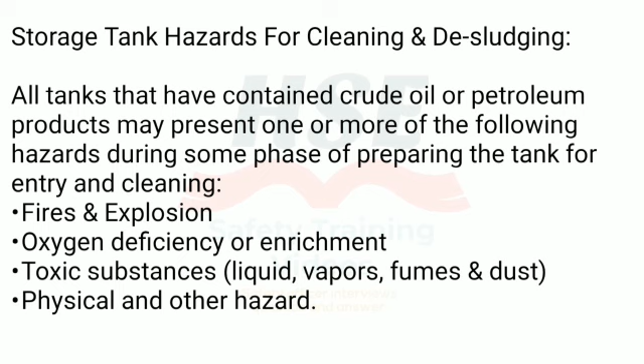11.1.1 Fire and explosion hazard. The potential for a fire within or outside a tank can exist during all phases of tank work, from decommissioning through recommissioning, depending upon a number of factors including tank design, its integrity, air fuel ratio and the number of open vents. Fire inside a tank may cause an explosion due to expanding gas.

11.1.2 Oxygen deficiency. An oxygen deficiency can exist in a tank for a number of reasons. A. The vapors of some hydrocarbons stored in atmospheric or low-pressure tanks are heavier than air and will displace or dilute air. B. If a tank has been closed, oxidation or rust can deplete the tank oxygen content. C. A tank that is maintained under an inert gas will be almost devoid of oxygen.

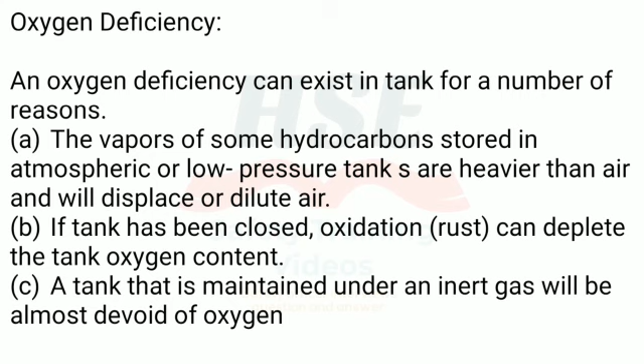11.1.3 Oxygen enrichment. An oxygen enrichment hazard is where the oxygen concentration is over 23.5%. Occasionally, oxygen bottles or cylinders used during tank work may leak and provide a source of oxygen enrichment.

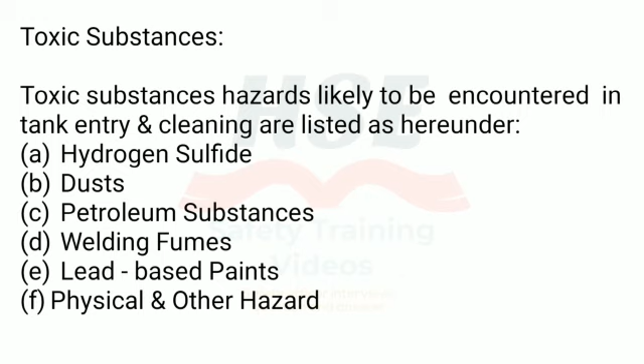11.1.4 Toxic substances. Toxic substance hazards likely to be encountered in tank entry and cleaning are listed as hereunder: A. Hydrogen sulfide. B. Dusts. C. Petroleum substances. D. Welding fumes. E. Lead-based paints. F. Physical and other hazards.

A. Hydrogen sulfide. H2S is an extremely toxic, flammable gas that is encountered in the production, processing and storage of sour crude oil. Exposure to a high enough concentration of H2S causes death by paralysis of the respiratory system.

B. Dusts. Dust encountered in tank maintenance includes that caused by the removal of rust, paint and tank insulation.

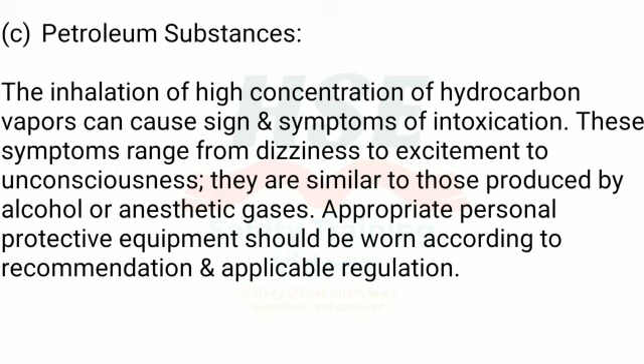C. Petroleum substances. The inhalation of high concentrations of hydrocarbon vapors can cause signs and symptoms of intoxication. These symptoms range from dizziness to excitement to unconsciousness, and are similar to those produced by alcohol or anesthetic gases. Appropriate personal protective equipment should be worn according to recommendation and applicable regulation.

D. Welding fumes. Toxic fumes are generated during welding on metals coated with or containing alloys of lead, zinc, cadmium, beryllium and certain other metals. Some paints may produce toxic fumes when heated with a welding torch. The potential health effects of welding fumes vary in type and severity depending on the composition and concentration of fumes generated.

E. Lead-based paints. Significant lead exposure can occur during removal of paint from surfaces previously coated with lead-based paint. Cumulative exposure to lead may result in damage to the blood, nervous system, kidneys, bones, heart and reproductive system. Prior to commencing work on a tank, a written lead abatement program shall be developed for the safe removal and handling of lead-based paint. This program shall include procedures for the use of appropriate engineering controls, work practices and personal protective equipment to keep exposure below permissible limits.

F. Physical and other hazards. In addition to injury or property damage that may result from fires, explosions, asphyxiation and toxic substances, additional hazards may emerge from the following situations.

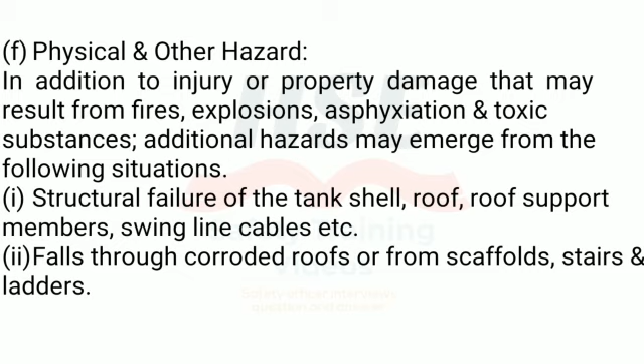1. Structural failure of the tank shell, roof support members, swing line cables etc. 2. Falls through corroded roofs or from scaffolds, stairs and ladders. 3. Accidental discharge of steam, high pressure air, water or oil either into the tank or against personnel working outside, due to inadequate isolation. 4. Failure to disconnect or make electrical or mechanical equipment inoperative.

5. Use of lighting fixtures inappropriate to hazardous area classification. 6. Sharp angles, welding lugs etc. within the tank that can snag clothing or skin, in addition to tangling or cutting retrieval lines.

11.2 Additional hazard considerations for floating roof tanks. The following additional hazard considerations are to be kept in view as a measure to identify, evaluate and protect entrants from potential hazards associated with entry on floating roofs.

11.2.1 Hydrocarbon entrapment hazard. A flammable atmosphere may also be present inside pontoons, devices for providing buoyancy, floats, primary and secondary seal areas, or underneath floating roofs out of flotation. These areas must be considered as separate confined spaces and must be tested appropriately. These spaces may also need to be ventilated or inerted and the atmosphere retested prior to permitting entry.

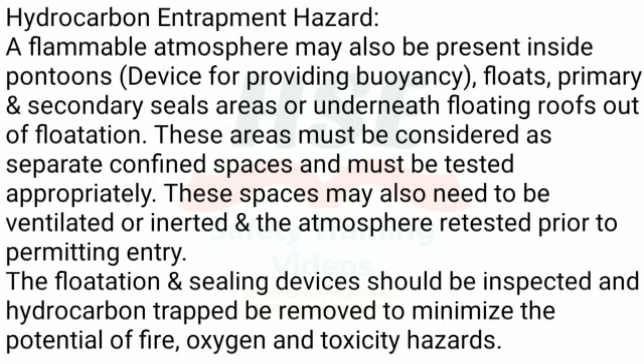The flotation and sealing devices should be inspected and trapped hydrocarbons removed to minimize the potential of fire, oxygen and toxicity hazards. The greatest vapor concentration above the floating roof may be expected when the roof has been out of flotation and is then being refloated. These vapors may persist for extended periods depending on conditions.

11.2.2 Potential fire hazard. Some of the potential fire hazards associated with descent upon floating roofs include, but are not limited to the following: A. A flammable vapor-air mixture may exist in the atmosphere above the floating roof due to roof seal leakage. B. A flammable liquid may be present on the floating roof due to overflow or pontoon leakage.

C. A flammable liquid or vapor may be present in the pontoon or seal area due to pontoon leak or seal rupture. D. The leakage of liquids or vapor from pontoons, buoyant foam panels, other flotation devices, linings and seals may result in toxic or flammable vapors being present in the tank vapor space.

E. When the floating roof is out of flotation and the liquid level is below the roof support, a flammable vapor-air mixture may exist in the atmosphere below the roof. F. A buildup of vapors may be more likely in internal floating roof tanks because of the possibility of liquid being retained inside the envelope formed of flotation and sealing components.

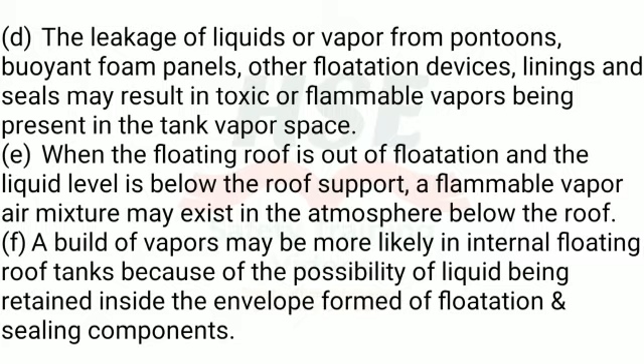G. Plastic used in internal floating roofs may be combustible, and this characteristic should be considered, particularly for activities involving hot work or source of ignition. Seals may also be made of combustible material or may be oil-soaked.

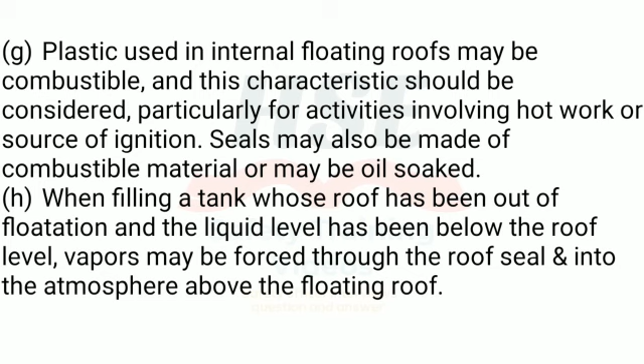H. When filling a tank whose roof has been out of flotation and the liquid level has been below the roof level, vapors may be forced through the roof seal and into the atmosphere above the floating roof.

11.2.3 Potential physical hazards. Entry onto floating roofs presents potential physical hazards including but not limited to: A. Floating roofs shall be visually inspected from above for structural stability prior to descent. The height of the roof above the tank bottom may not permit personnel to walk erect.

B. Many internal floating roofs are of light construction and walking on the roof surface can be hazardous unless limited to areas designated for that purpose.

C. If weak areas are found during inspection or are known to exist in the floating roof, access to these areas shall be prohibited until suitable reinforcement has been provided.

D. Defective roof areas or panels, which were not designed to support the weight of personnel, may be difficult to detect because of the restricted visibility above the roof.

E. Entry upon internal floating roofs which do not have pontoons for increased buoyancy should be considered extremely hazardous and conducted under specific safe work procedures and practices to protect entrants from entrapment in case the roof sinks or tilts.

The outside roofs and covers, wind girders, ladders, stairways, walkways, rails and other roof supports shall be inspected to assure that they can hold the weight of any equipment or material to be placed on top of or attached to them.

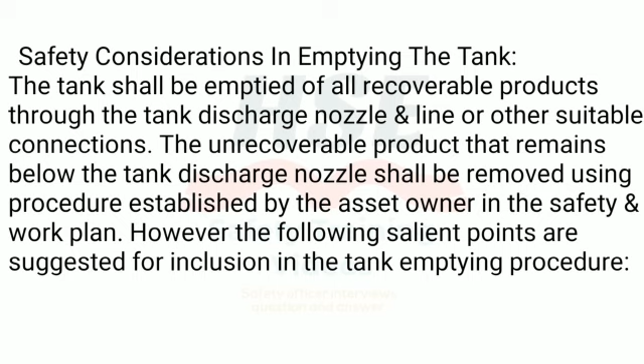However, the following salient points are suggested for inclusion in the tank emptying procedure. A. The tank to be emptied through existing lines until the main pump nearly loses suction.

B. If a temporary field pump is used to complete the emptying process, check the safety and integrity of the pump, hose and other accessories including conformance to hazardous area classification.

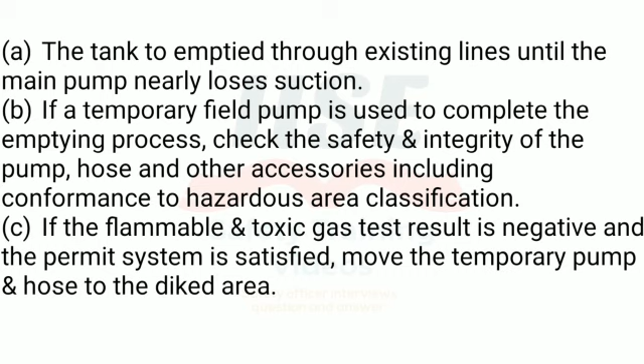C. If the flammable and toxic gas test result is negative and the permit system is satisfied, move the temporary pump and hose to the diked area. D. Confirm that temporary equipment is electrically bonded and grounded.

E. Pump out remaining liquid with the field pump until it loses suction. F. Alternate method for removing remaining product is by filling water into the tank; the remaining oily product will float on water and can be removed through the discharge line.

11.3.2 Safety considerations in isolating the tank.

The tank shall be isolated from all lines connected to the tank by using blanks, blinds, or double block and bleed valves, all of which shall be as close as possible to the tank.

If the tank valve or line is to be removed and the tank has cathodic protection, the following precautions are to be taken: 1. The cathodic protection shall be turned off. 2. A bond wire shall be installed from the tank to the line. 3. The valve or line shall be disconnected and removed along with the bond wire.

The following additional safety considerations are to be adhered to for tank isolation and preparation prior to tank entry. A. Prepare documents required under the permit program and the lockout, tagout procedure, including isolating device listing. B. Close all suction and discharge lines at the tank and install lockout, tagout devices.

C. Lockout and tagout all energy sources such as pumps, motors, mixers, and instrumentation devices. D. Use of motorized equipment, such as automobiles, trucks, forklifts, welding machines, and compressors shall be limited to safe areas by posting signs and barricading access as necessary.

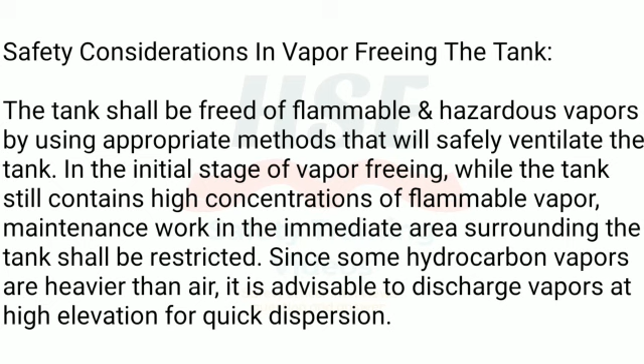There are several methods of vapor freeing a tank, such as mechanical ventilation, steam ventilation, inert gas purging, and natural ventilation.

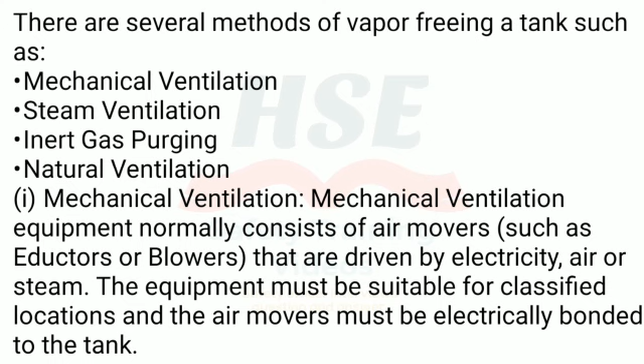1. Mechanical ventilation. Mechanical ventilation equipment normally consists of air movers, such as eductors or blowers, that are driven by electricity, air, or steam. The equipment must be suitable for classified locations, and the air movers must be electrically bonded to the tank. Air movers which have moving parts or can otherwise produce spark or ignition source should not be used in applications where tank vapors may be in the flammable range and will pass through the air mover. Eductors with no moving parts should be used in such applications.

2. Steam ventilation. Steam ventilation may be advantageous in specific cases, but its use introduces some additional hazards. Steam ventilation should be avoided when suitable alternatives are available.

3. Inert gas purging. If this method of gas freeing is used, then additional precautions are necessary to ensure appropriate ventilation for removing the inert gas prior to tank entry and cleaning.

4. Natural ventilation. Natural ventilation simply entails removing the roof and shell manway covers and allowing the tank to stand idle until natural ventilation makes the tank vapor-free. Natural ventilation should be avoided if other methods are available because vapor may drift to a source of ignition.

B. It is highly recommended for the asset owner to prepare a detailed procedure of vapor freeing based on size and type of tank.

11.3.4 Safety precautions for testing the tank atmosphere.

Prior to starting any work outside or inside the tank, testing of the tank atmosphere for the following contents shall be carried out in the order as mentioned hereunder: oxygen content, flammable vapors, toxic vapors.

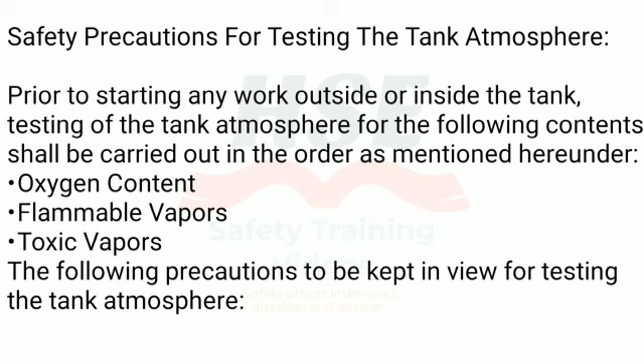The following precautions are to be kept in view for testing the tank atmosphere. A. The test equipment should be intrinsically safe or suitable for hazardous area classification. B. The atmosphere around the tank shall be tested after the completion of preparatory steps and during the ventilation process, when and how much activity can take place around the tank.

C. The test shall also be taken at points where vapors are being exhausted from the tank and in the area around to ensure non-existence of flammable and toxic vapors above permissible levels.

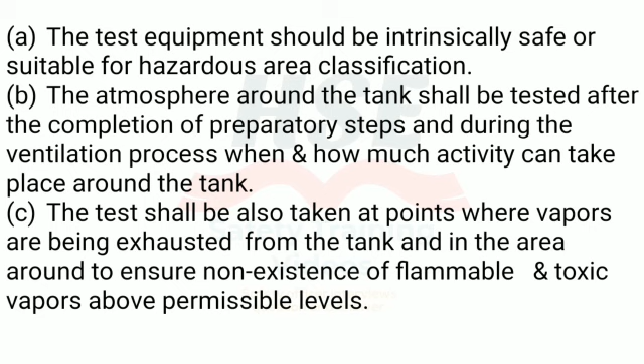D. A qualified person shall test the internal atmosphere to establish existence of permissible entry conditions throughout the tank. F. The atmosphere inside the tank interior shall be tested especially in critical and suspect areas, such as leaking tank bottom, roof supports, sumps, roof seals, roof drains, etc.

G. The ventilating equipment should be shut down for 15 minutes, allowing the tank atmosphere to reach equilibrium conditions before testing the interior. H. The qualified person performing the test shall wear self-contained breathing apparatus (SCBA) and appropriate protective clothing when entering the tank for testing purposes.

Care shall be taken by the qualified person who performs the tests to ensure that results represent the true condition of the tank.

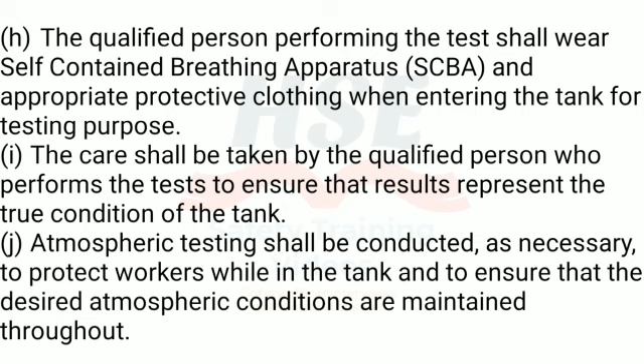Atmospheric testing shall be conducted, as necessary, to protect workers while in the tank and to ensure that the desired atmospheric conditions are maintained throughout.

The results of atmospheric testing, the time of testing, and the signature of the person who performed the tests shall be recorded in the entry permit, as well as in the work permit.

If test results and tank conditions are acceptable, the entry permit for work will be issued. If test results are not acceptable, then the ventilation process will continue and testing steps will be repeated.

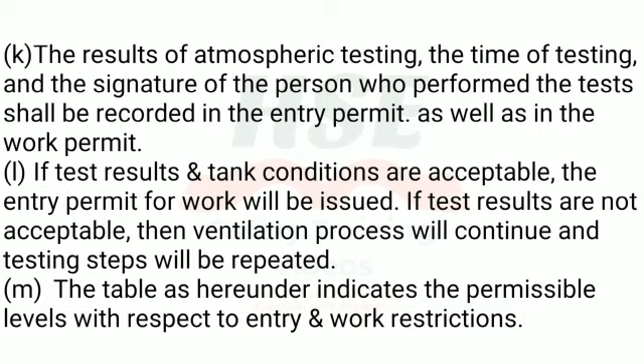The table hereunder indicates the permissible levels with respect to entry and work restrictions. Entry without respiratory protection is permitted, referring to Notes 1 and 2, when oxygen concentration is between 19.5% and 23.5%.

H2S concentration is less than 10 parts per million, air contaminants are below permissible exposure limits (PEL), hydrocarbon concentration is less than 1% of LFL, and an adequate flow of fresh air is maintained.

Respiratory protection is required for entry when oxygen content is less than 19.5% or greater than 23.5%.

H2S concentration is greater than 10 parts per million, air contaminants are above the permissible exposure limit (PEL), or hydrocarbon concentration is greater than 1% LFL but less than 10% LFL.

No entry is permitted when hydrocarbon concentration is greater than 10% LEL.

No entry is also required when hazardous materials such as acids or caustics are present, when the toxicity of the atmosphere is immediately dangerous to life or health, or when the facility or associated process is experiencing an operational problem.

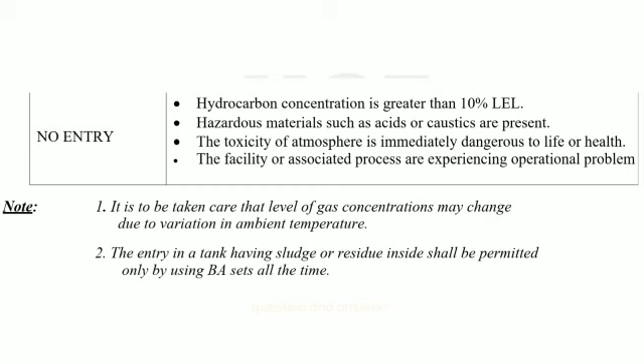Note 1: it is to be taken care that the level of gas concentrations may change due to variation in ambient temperature. Note 2: entry into a tank having sludge or residue inside shall be permitted only by using BA sets at all times. Section 11.4: Precautions for entry upon a floating roof tank.

11.4.1 Ventilation requirements: mechanical forced air ventilation arrangement will vary according to the type, size and configuration of the tank. Air or steam-driven eductors or blowers are recommended in order to reduce ignition hazards.

If electric motor-driven blowers are used, they shall be suitable for the hazardous area classification. All air movers shall be properly bonded to the tank shell or roof to eliminate the possibility of any electrostatic accumulation.

A. The atmosphere within the work area shall be periodically tested as necessary to ensure that the continuous mechanical forced air ventilation is preventing the accumulation of any hazardous atmosphere.

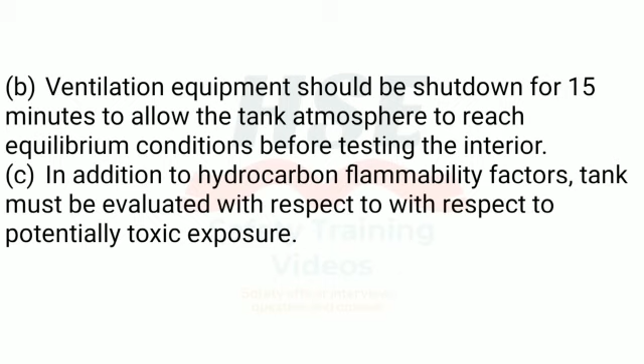B. Ventilation equipment should be shut down for 15 minutes to allow the tank atmosphere to reach equilibrium conditions before testing the interior. C. In addition to hydrocarbon flammability factors, the tank must be evaluated with respect to potentially toxic exposure.

11.4.2 Testing the atmosphere above and below the floating roof. In addition to precautions and procedures described in Section 6.4 for testing the tank atmosphere, the following care should also be kept in view.

A. In case of floating roof tanks, particularly the internal type, initial oxygen, flammable vapor and toxic substances tests may be made with an instrument equipped with an extension device.

B. This testing can be done from the top of the tank so that preliminary readings can be obtained without descending onto the internal roof.

C. For descent onto the tank roof for further testing, the tester should have appropriate respiratory protection and protective clothing.

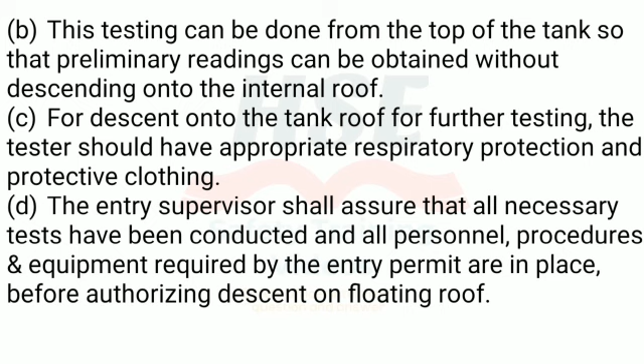D. The entry supervisor shall assure that all necessary tests have been conducted and all personnel, procedures and equipment required by the entry permit are in place before authorizing descent onto the floating roof.

E. As a minimum, atmospheric testing shall be conducted prior to descent at the beginning of each shift, prior to re-entry after any prolonged periods of inactivity or work interruption, prior to starting hot work, and any time conditions are suspected to have changed.

F. The atmospheric testing in the work area above the surface of the floating roof shall be either continuous or conducted as necessary to assure the continuation or maintenance of permitted safe working conditions.

G. The need for continuous or intermittent monitoring and the use of approved respiratory protective equipment shall depend on the results of the testing and the potential for increased atmospheric contamination or oxygen availability during entry and work operation.

H. If potential exists for acute toxic exposures, such as H2S, then continuous monitoring equipment shall be used even if initial monitoring indicates a safe level.

I. The criteria for entry without respiratory protection will be based on permissible exposure limit (PPM) rather than percent of LFL. J. The results of testing the atmosphere above the floating roof must meet the following criteria.

1. The oxygen content of the air is at least 19.5% and not greater than 23.5% for entry onto the floating roof without air-supplied respiratory protection, provided there is no flammable or toxic concentration.

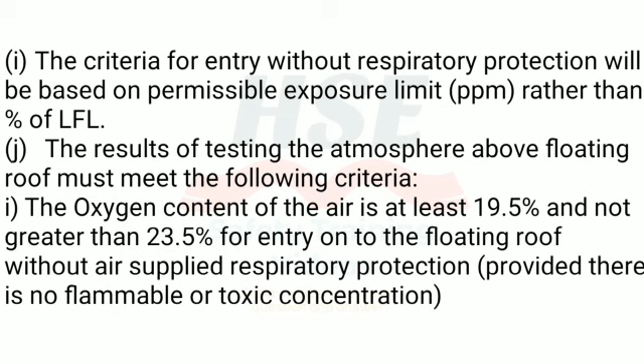2. The oxygen content of the atmosphere is at least 10% in order to accurately determine flammable hydrocarbon vapor levels. 3. Hydrocarbon vapor levels in the atmosphere are below 10% LFL in order to allow entry onto the floating roof with approved respiratory protection system.

Precautions for descent onto external, open-top floating roofs. Before initial descent onto the floating roof is authorized, the assigned tester shall conduct atmospheric tests from outside the tank. The following precautions in this regard are to be observed.

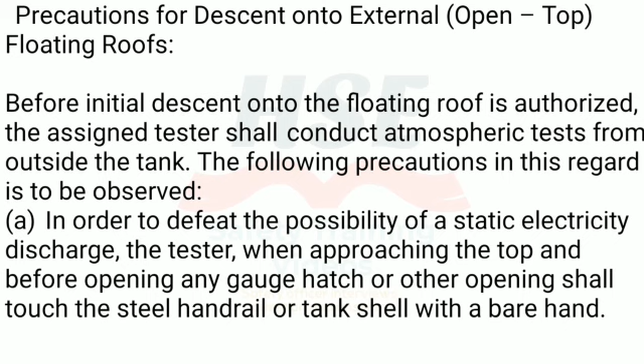A. In order to defeat the possibility of a static electricity discharge, the tester, when approaching the top and before opening any gauge hatch or other opening, shall touch the steel handrail or tank shell with a bare hand.

B. After atmospheric tests have been conducted from outside the tank, the tester shall descend cautiously for the purpose of gas testing, wearing an approved air-supplied respirator if the tank contains sour product.

C. An attendant shall be stationed at the platform or access ladder on the roof of the tank to observe and maintain visual and/or oral contact with the tester during the initial descent.

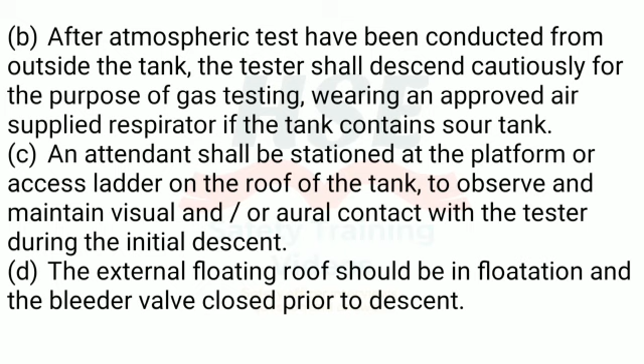D. The external floating roof should be in flotation and the bleeder valve closed prior to descent. E. Entrants shall not be allowed to descend onto an external floating roof which is out of flotation until atmospheric testing has been conducted both above and below the roof and the condition is acceptable.

F. Following the initial descent and completion of atmospheric testing and inspection by the tester, the entry supervisor shall ensure that all required conditions specific to the proposed work have been met prior to issuing an entry permit.

G. Leg positioning pins should be located in the high roof position with retaining cotter pins. This precaution will facilitate cleaning operations by supporting the roof at as high a position as possible above the tank bottom. H. Atmospheric testing shall be conducted continuously or at regular intervals during work on the external floating roof.

If the work is to be performed on or near seals, vents or other openings, additional testing must be conducted to assure that the atmosphere in the immediate work area meets established safe work conditions.

I. Any entry into the pontoons or underneath the secondary seals of an external floating roof shall be considered as permit-required confined space entry. Each individual space shall be checked to determine the atmospheric conditions prior to issuance of entry permit.

J. Should operating, physical or atmospheric conditions change so that the area is no longer safe for work, entrants shall leave the floating roof immediately and shall not return until the safe entry conditions are confirmed through retesting as per procedure.

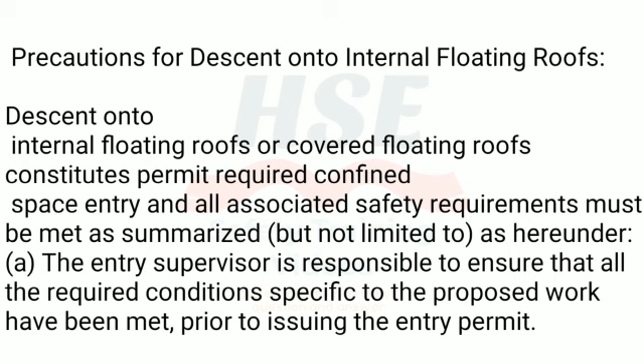B. The potential atmospheric hazards—flammable, toxic and oxygen deficiency—in the space between the internal floating roof and the cover on the top of the tank shall duly be considered.

C. The internal floating roof should be in flotation, not sitting on its legs, and bleeder valve closed prior to descent. D. Entrants shall not be allowed to descend onto an internal floating roof which is out of flotation, sitting on its legs, until atmospheric testing has been conducted both above and below the floating roof and conditions allow the issuance of a work permit.

E. Prior to descent, the internal floating roofs shall be checked for potential physical hazards and stability. The potential for falling through or tilting aluminum, expanded foam, or plastic floating roof shall be evaluated.

F. All electrical and other power-operated equipment such as tank mixers, heaters, steam coils and remote control tank valves shall be shut off at their motor controllers and locked and/or tagged as per procedure.

G. Continuous forced air mechanical ventilation may be necessary to maintain a safe atmosphere in the space above the internal floating roof. H. Any entry into the pontoons or underneath the secondary seals of an internal floating roof shall be considered as permit-required confined space entry.

Each individual space shall be checked to determine the atmospheric conditions prior to issuance of entry permit.

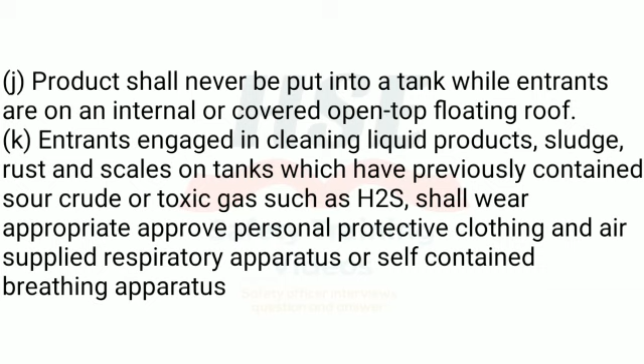Entrants engaged in cleaning liquid products, sludge, rust and scales on tanks which have previously contained sour crude or toxic gas such as H2S shall wear appropriate approved personal protective clothing and air-supplied respiratory apparatus or self-contained breathing apparatus.

11.7 Safety and rescue equipment. Difficult rescue situations can develop if entrants become ill, are injured, or are otherwise incapacitated while on the floating roof or inside the tank. The appropriate rescue provision to be used will depend upon the type, service, and operations of the tanks and the work being performed.

The safety plan for tank work should include a means for timely rescue of workers from the tank with the following considerations. A. Self-contained breathing apparatus, SCBA, should be immediately available at the tank for rescue operation by trained personnel. B. A light-weight material to spread the weight of personnel over a greater area of the floating roof. C. A rescue toboggan, which will fit through the roof manway for lifting an incapacitated person out of the tank.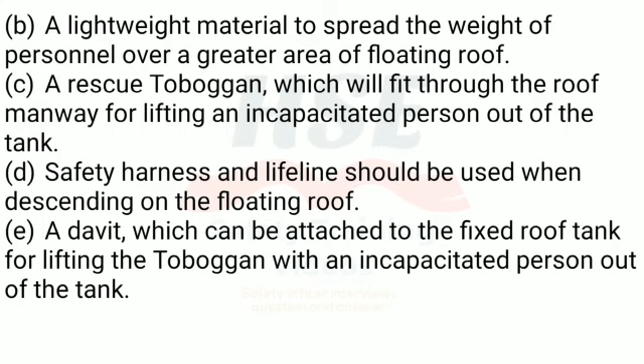D. Safety harness and lifeline should be used when descending on the floating roof. E. A davit, which can be attached to the fixed roof tank for lifting the toboggan with an incapacitated person out of the tank. F. An attendant shall be stationed at the top of the ladder or near the roof opening to maintain visual or oral contact with entrants on the floating roof.

G. The attendant shall immediately advise the entrants if an emergency occurs elsewhere in or near the facility, which requires them to exit from the floating roof.

11.8 Decommissioning Safety Check. The decommissioning safety check as tabulated hereunder shall be carried out. S. No. Decommissioning safety check status.

1. Electrical. The tank shell earthing connections are removed. The earth cables associated with the floating roof cover are disconnected and intact. The grounding seal, bonding shunts on the floating roof are removed. The cathodic protection system on the piping is de-energized. Electrical fittings associated with any side entry mixers are disconnected.

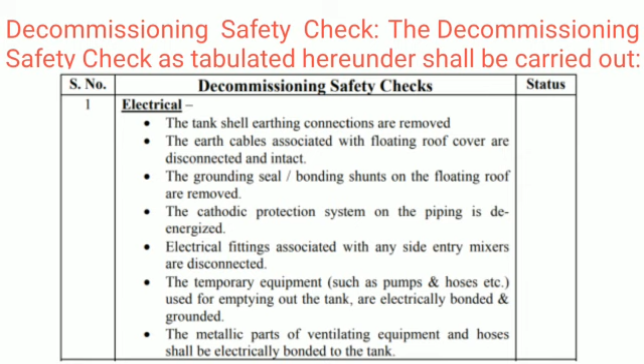The temporary equipment, such as pumps and hoses etc., used for emptying out the tank, are electrically bonded and grounded. The metallic parts of ventilating equipment and hoses shall be electrically bonded to the tank.

2. Operational. Inlet valves to tank are isolated, spaded and tagged. The tank is emptied out till the field pump loses suction. The flotation and sealing devices are free from hydrocarbon. The tank is thoroughly vapor-freed.

All outlet valves from the tank are isolated, spaded and tagged after the tank is empty and vapor-free. The tank atmosphere has been tested for oxygen content, flammable and toxic vapors, and the results are acceptable from a safety viewpoint. 3. Fire protection.

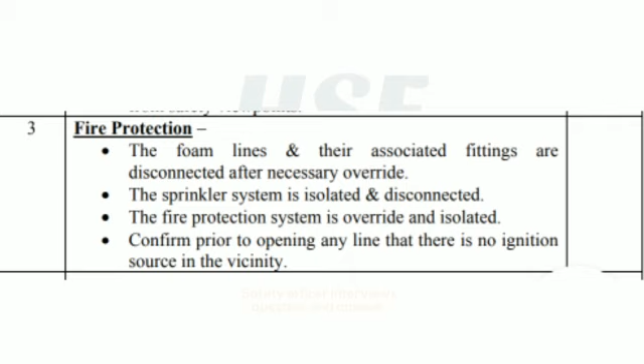The foam lines and their associated fittings are disconnected after necessary override. The sprinkler system is isolated and disconnected. The fire protection system is overridden and isolated. Confirm prior to opening any line that there is no ignition source in the vicinity.

4. Mechanical. The internal floating cover is removed. The side entry mixers are removed.

5. Instruments. Tank level gauging equipment is disconnected. Any separate high or low level alarms are overridden. The tank temperature measurement instrumentation is disconnected. Any instrumentation associated with side entry mixers is removed.

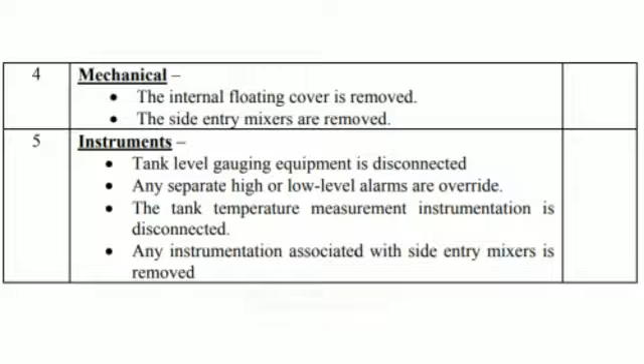11.9 Entry permits for the tank. Before entering a tank, a written entry permit shall be issued by a qualified person. The qualified person who issues the permit shall be familiar with the configuration of the tank to be entered and the reason for tank entry.

Conditions and precautionary measures for entry will depend upon the potential hazards associated with the entry, atmospheric test results, other physical hazards, and structural conditions and constraints. The conditions within the tank will determine the level of precautions necessary for entry. However, the following considerations are to be kept in view prior to authorizing entry permits.

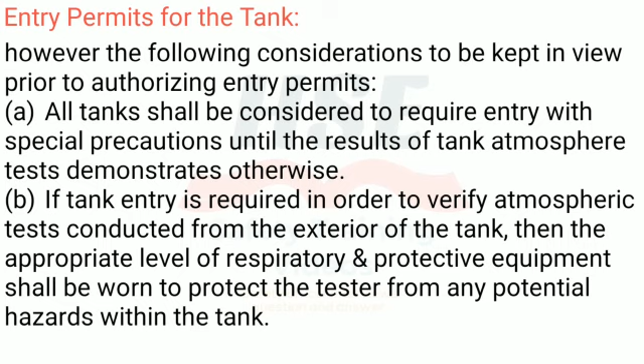A. All tanks shall be considered to require entry with special precautions until the results of tank atmosphere tests demonstrate otherwise. B. If tank entry is required in order to verify atmospheric tests conducted from the exterior of the tank, then the appropriate level of respiratory and protective equipment shall be worn to protect the tester from any potential hazards within the tank. C. The tank conditions shall be carefully monitored throughout the entry, as necessary, to ensure conditions remain within permitted entry levels.

D. If conditions change during the course of entry, all work shall stop and workers shall exit the tank until the conditions can be reassessed. E. Any tank that has been cleaned but closed and inactive shall be retested for entry as though it were the initial test.

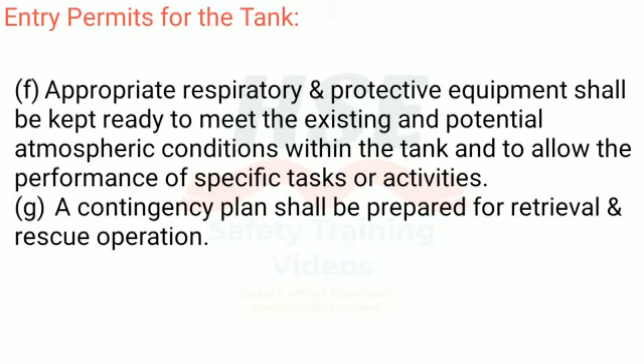F. Appropriate respiratory and protective equipment shall be kept ready to meet the existing and potential atmospheric conditions within the tank and to allow the performance of specific tasks or activities. G. A contingency plan shall be prepared for retrieval and rescue operation.

11.10 Precautions during tank cleaning. The tank entry permit shall be executed provided the test results and tank conditions are acceptable and safe for entry, ignition sources have been controlled, no lightning storms are threatening, and the integrity of the tank is satisfactory.

The following considerations shall be kept in view during tank cleaning operations. A. Prior arrangement shall be made for disposal of tank sludge, which must comply with company and state regulations for disposal in an environmentally approved manner.

B. Prior to physical sludge removal, it is advisable to remove as much of the sludge as possible by resuspending and pumping it out. This is particularly viable if the sludge level is above manways.

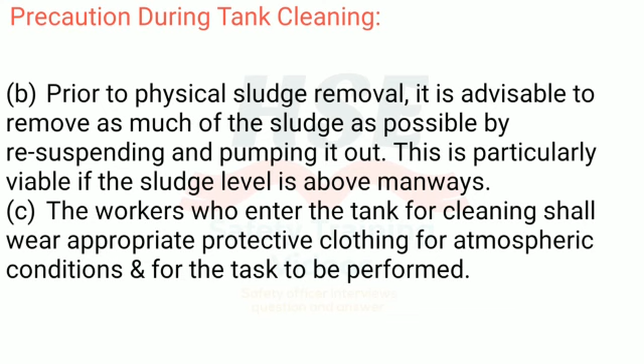C. The workers who enter the tank for cleaning shall wear appropriate protective clothing for atmospheric conditions and for the task to be performed.

D. If a tank is entered while under special precautions, OSHA permit required confined space, at least one attendant shall be made available as standby personnel outside the tank to monitor activities, record entrance, control potential hazards, and coordinate for rescue operations.

E. Atmospheric testing shall continue periodically, such as at the start of each workday, at each shift, and during the shift as conditions change due to temperature increase, agitation of sludge, leaking tank bottom exposed, piping leaks, hydrocarbon absorbed in roof seal, etc.

F. If the tank has side manholes, a water hose stream can be used for cleaning from outside the tank. The hose nozzle must be electrically bonded to the tank.

G. The loose sludge and waste materials shall be removed, and as needed the tank can be washed from inside. H. Tank nozzles, columns, floating roofs, and support members are capable of trapping hydrocarbons and should be cleaned. The areas above the floating roof and flotation compartments should also be cleaned.

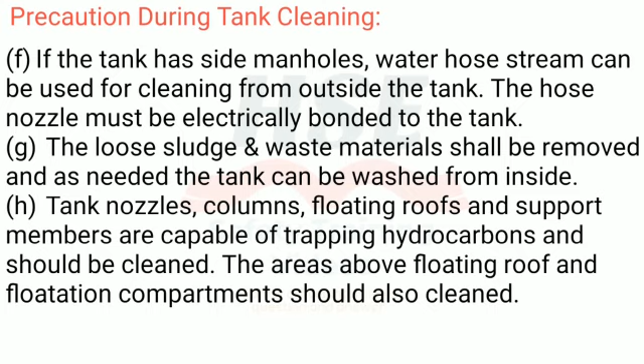I. Continuous ventilation should be ensured throughout the cleaning process. The impact of gaseous emissions resulting from cleaning operations shall be taken into account.

J. The contractor engaged in the off-site transportation of the sludge must comply with EPA regulations in this regard. K. The workers inside the tank should be closely monitored, particularly when working during warm climates. L. The required control over potential ignition sources should be continuously maintained.

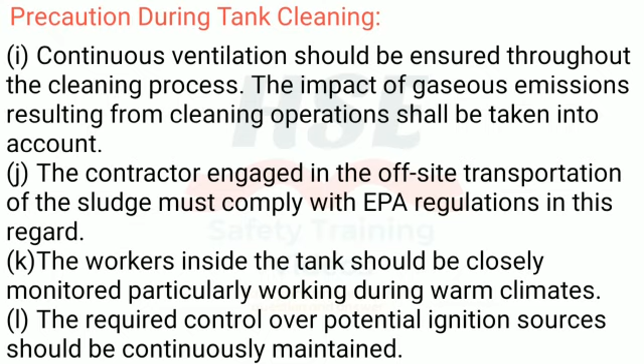11.11 Precautions during hot work inside the tank. If the tank repairing involves hot work, then the surface to be heated, including roofs, structural members, scaffoldings and pontoons, shall be free of flammable vapor and liquid, ignitable scale deposits, waxes and other deposits that may evolve vapors.

Sometimes such deposits are hidden on the upper surfaces of roof rafters and flammable vapor analyzers may not indicate the presence of these materials. Extreme care and the considerations mentioned hereunder shall be taken prior to starting hot work inside the tank.

A. Flammable and toxic liquids and vapors may enter through a leak in the tank bottom or may evolve from pockets that exist in spaces such as pipe column roof supports, chambers, swing lines, and sumps, etc.

B. The application of heat may produce flammable or toxic vapors. Frequent tests shall be made to verify that the atmosphere in the tank is not in the LEL or TLV range of such substances.

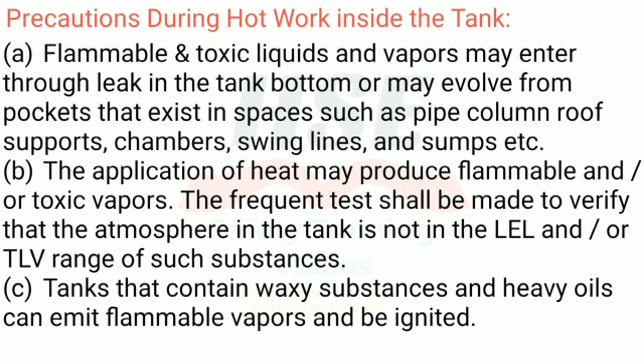C. Tanks that contain waxy substances and heavy oils can emit flammable vapors and be ignited. D. Toxic atmospheres may originate from welding fumes, the material being welded, or lead-based paint coatings.

E. The necessary protection shall be provided against hazardous materials such as toxic vapors generated from welding rods or coatings, dust produced by wire brushing or grinding, and exposed hot metallic surfaces.

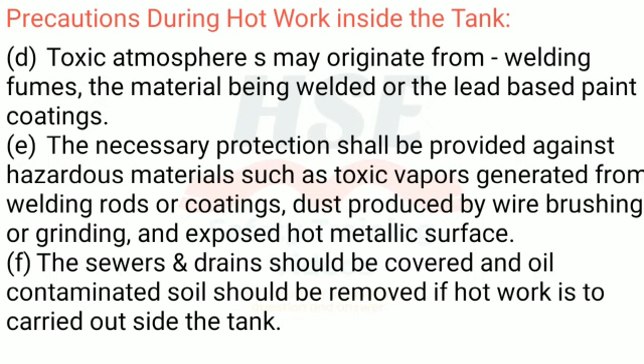F. The sewers and drains should be covered and oil-contaminated soil should be removed if hot work is to be carried out outside the tank.

G. There is a possibility of an oxygen-enriched atmosphere from leaking hoses, torches or cylinder valves when using acetylene/propane burning equipment. Oxygen and other gas bottles shall not be taken inside the tank for hot work requirements, and hoses and torches should be disconnected from the source if not in use for a longer duration.

J. A hot work permit shall be issued by a qualified person before starting the work, and atmospheric tests must be taken in the surrounding and immediate area of work. K. Fire extinguishers or a pressurized fire water hose in working order shall be kept available at the work location.

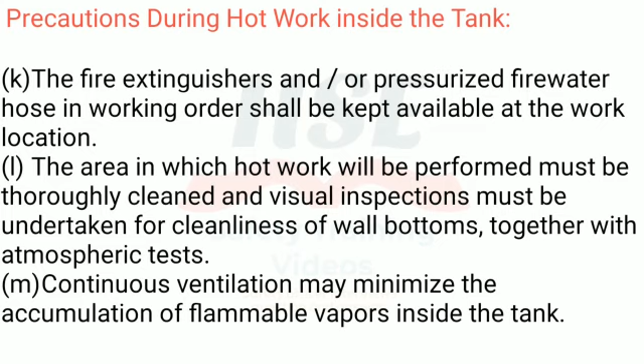The area in which hot work will be performed must be thoroughly cleaned and visual inspections must be undertaken for cleanliness of wall bottoms, together with atmospheric tests. Continuous ventilation may minimize the accumulation of flammable vapors inside the tank.

Recommissioning the tank. The planning and procedure to recommission the tank must consider the following safety aspects. The tank must be surveyed thoroughly to ensure cleaning and other work completion, tank internals replaced, floating roof components installed, and no debris or maintenance tools left inside. All manways shall be closed properly and all unexpired permits are revoked.

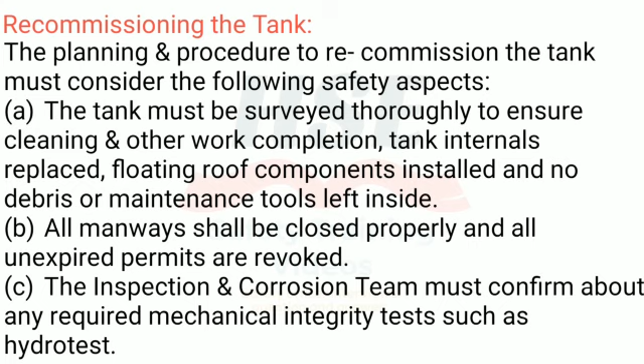The inspection and corrosion team must confirm about any required mechanical integrity tests such as hydrotest. All blinds and tags used for lockout or tagout must be removed and signed off. The tank must be filled with water up to level covering pump suction connection. Subsequently the tank shall be purged with nitrogen, venting the exhaust gas through the vent at topmost position. The purging shall continue till 4% oxygen content is achieved in the tank.

Returning floating roof tank to service. When a flammable product is pumped into an empty floating roof tank, some of the vapors above the liquid will remain below the floating roof and some may be expelled to the space above the floating roof until the roof floats. The following safety considerations must be kept in view while returning a floating tank to service.

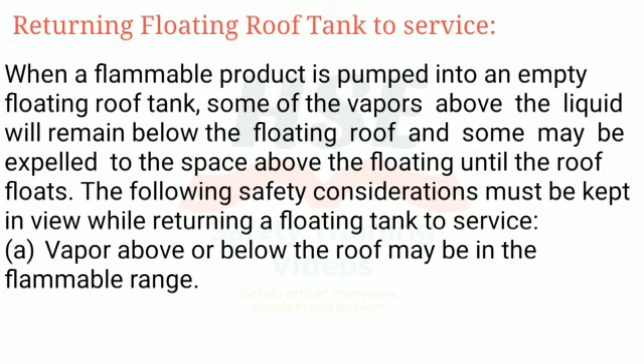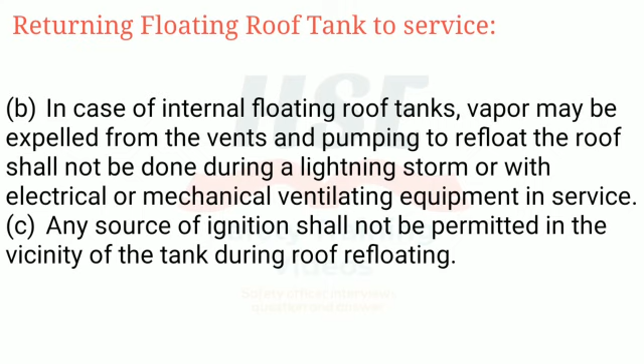Vapor above or below the roof may be in the flammable range. In case of internal floating roof tanks, vapor may be expelled from the vents, and pumping to refloat the roof shall not be done during a lightning storm or with electrical or mechanical ventilating equipment in service. Any source of ignition shall not be permitted in the vicinity of the tank during roof refloating.

The precautions concerning pumping rates and prevention of splashing to prevent static ignition and to minimize vapor generation shall be observed with external and internal floating roof tanks until the roof is floating. Sampling or hand gauging shall not be done during filling operation of tank.

Personnel shall not go onto the top of internal floating roof tanks or on the floating roof of external floating roof tanks for a period of approximately 18 hours after refloating, or until the vapor concentration above the roof is below 10% while the atmosphere is safe to breathe.

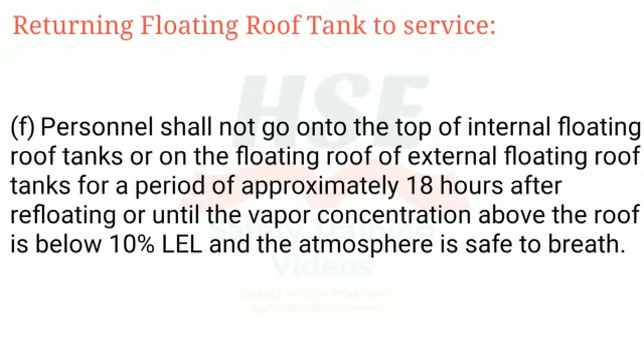Recommissioning safety check. The recommissioning safety check as tabulated hereunder shall be carried out. Serial number 1, Inspection: the tank foundation has been inspected and confirmed to be in satisfactory condition.

The bund walls have been reinstated. The dike drainage system is serviceable and clean. Necessary repairs to the tank have been carried out. Tank fittings and valves have been correctly reinstalled and serviceable.

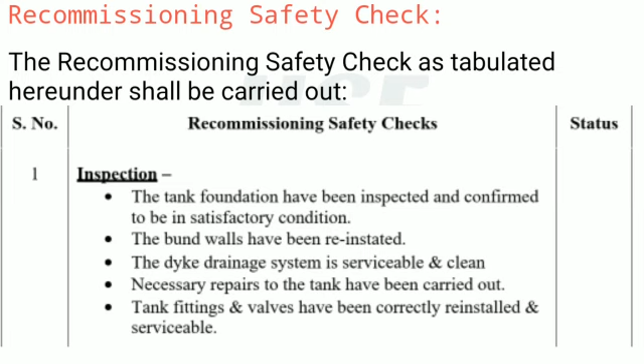2. Electrical: the tank shell is grounded and earthed. The earth cables associated with floating roof cover are securely connected and intact. The grounding seal and bonding shunts on the floating roof are correctly installed and intact. The cathodic protection system on the piping has been reinstated. Electrical fittings associated with any side entry mixers have been correctly installed.

3. Instruments: tank level gauging equipment has been reinstalled and function tested. Any separate high or low level alarms have been reinstalled and function tested. The tank temperature measurement instrumentation has been correctly reinstalled. Any instrumentation associated with side entry mixers have been correctly replaced.

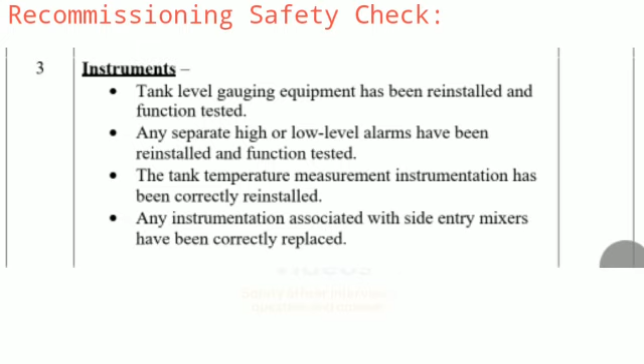4. Fire protection: the foam lines and their associated fittings have been correctly installed. The deluge system is correctly installed. The fire protection system has been function tested as per applicable codes and standards.

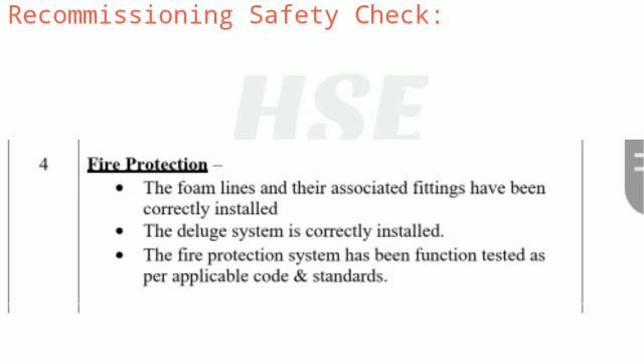5. Operational: the tank has been inspected internally and is acceptable for service. The tank has been inspected externally, including the roof and any internal floating cover, and is acceptable for service. All roof drains, water draw-off, suction and discharge valves are serviceable and identified. The tank drain valves are closed. The bund wall drain valve is tightly closed.

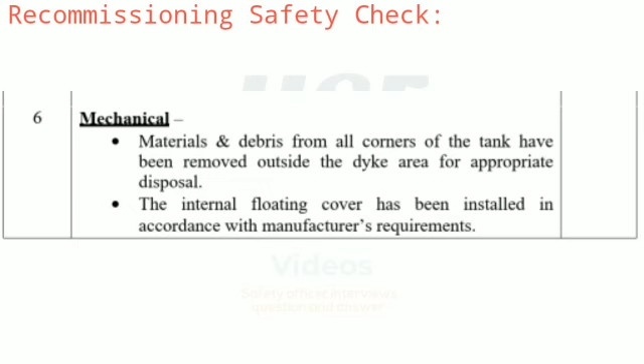6. Mechanical: materials and debris from all corners of the tank have been removed outside the dike area for appropriate disposal. The internal floating cover has been installed in accordance with manufacturer's requirements. The side entry mixers have been correctly installed. Handrails on stairways and around the tank roof are intact and secure.

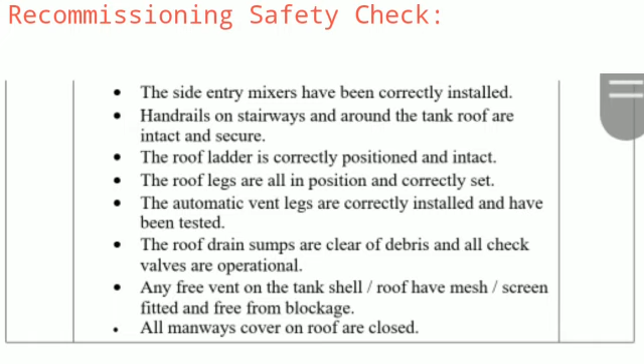The roof ladder is correctly positioned and intact. The roof legs are all in position and correctly set. The automatic vent legs are correctly installed and have been tested. The roof drain sumps are clear of debris and all check valves are operational. Any free vent on the tank shell or roof has mesh screen fitted and is free from blockage. All manways covers on the roof are closed.

11.12.3 Tank filling. Once the above-mentioned safety checks results are acceptable, then the tank will be lined up for filling, and the following precautions are to be taken during the operation.

A. The initial filling is to be carried out slowly until the tank suction line is well submerged to avoid turbulence and generation of static charges.

B. As the open area above the liquid level may go through the flammable range, hence a strict control of ignition sources is required. The tank shall not be filled during lightning storm.

C. The floating roof tank shall be filled slowly to avoid canting of roof until roof lifts off its support legs. D. The workers should not go on top of the floating roof tanks for a period of approximately 18 hours after refloating

or until the vapor concentration above the roof is below 10% LFL and the atmosphere is safe to breathe.

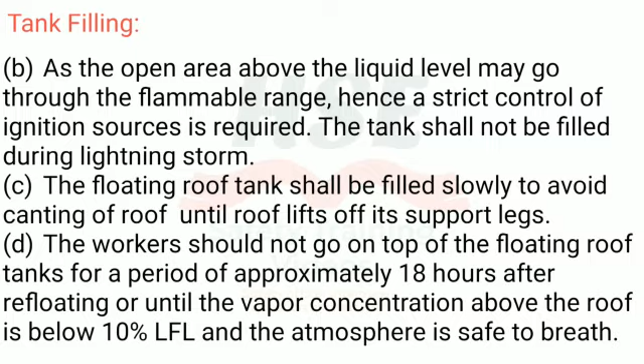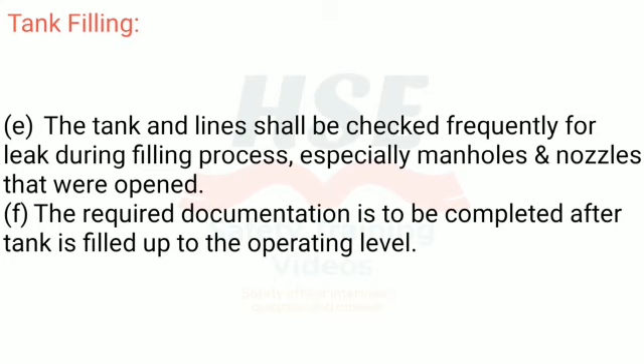E. The tank and line shall be checked frequently for leak during filling process, especially manholes and nozzles that were opened. F. The required documentation is to be completed after tank is filled up to the operating level.

11.13 Safety during tank construction, erection and maintenance. A. Safety aspects during tank construction.

Tanks shall be constructed in accordance with internationally accepted codes and standards, such as American Society of Mechanical Engineers, ASME, American Society for Testing and Material, ASTM, American Petroleum Institute, API, and Institute of Petroleum, IP. The following safety aspects must be kept in view during tank construction phase.

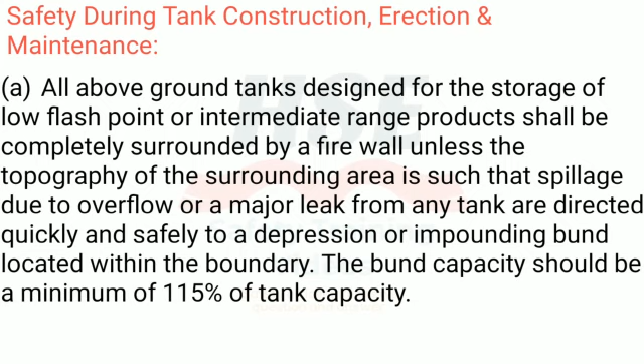A. All above-ground tanks designed for the storage of low flash point or intermediate range products shall be completely surrounded by a firewall unless the topography of the surrounding area is such that spillage due to overflow or a major leak from any tank are directed quickly and safely to a depression or impounding bund located within the boundary. The bund capacity should be a minimum of 115% of tank capacity.

B. The bund wall shall be designed to withstand the pressure to which it would be subjected if the volume within the walled enclosure were filled with water. C. Adequate drainage shall be provided for safe removal of water from the walled enclosure or depression.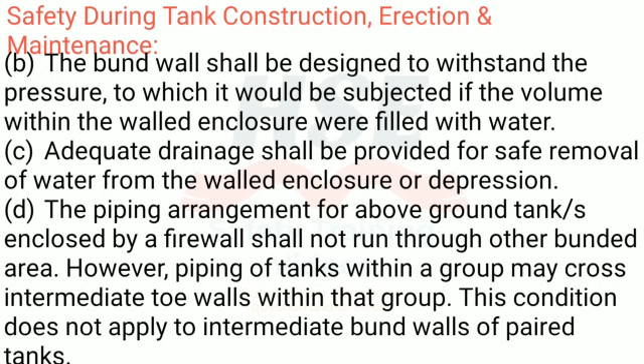D. The piping arrangement for above-ground tank, enclosed by a firewall shall not run through other bunded area. However, piping of tanks within a group may cross intermediate toe walls within that group. This condition does not apply to intermediate bund walls of paired tanks.

E. Pumps shall be located outside the bund area unless high flash point viscous stock requires the pump to be located within the bunded area. The piping, valves or flanges shall also be kept to the minimum required and buried wherever possible. Any fittings prone to failure on exposure to fire shall be avoided.

B. Safety aspects during tank erection. The following safety aspects must be kept in view during tank erection.

A. The area in which a tank is to be erected must be made safe for hot work activities before mobilizing construction material at site. B. As far as practicable, each tank should be housed in the individual bund.

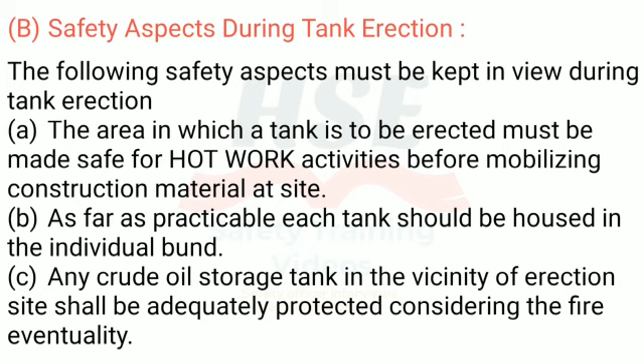C. Any crude oil storage tank in the vicinity of erection site shall be adequately protected considering the fire eventuality. D. When a new tank is to be constructed in close proximity to an existing tank, forming a group within a common bund, the tank containing intermediate or low flash point products must be emptied, cleaned and made gas-free before erection of the new tank commences.

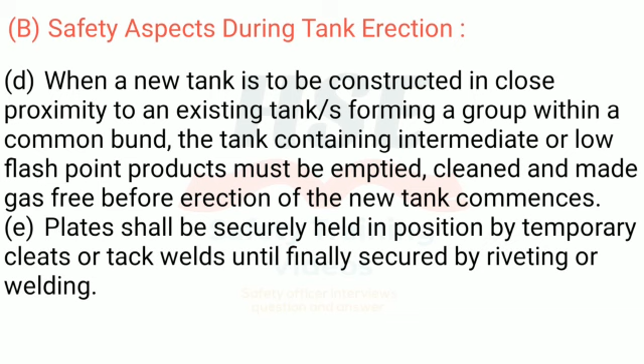E. Plates shall be securely held in position by temporary cleats or tack welds until finally secured by riveting or welding. F. To reduce the possibility of damage by wind, all the plates in uppermost strake shall be supported properly in position and secured adequately when left unattended at the end of the working day.

G. During erection of fixed roof tank, when a height of 4 strakes is reached, adequate guy ropes shall be attached to each plate of the uppermost strake, preventing damage by wind pressure. The same requirement shall be observed for floating roof tanks also if roof flotation is not employed during construction phase.

H. After erection, the tank shall be subjected to hydraulic test as per applicable code and standard. A prior arrangement shall be made to safely dispose off water from the tank on completion of hydrotest.

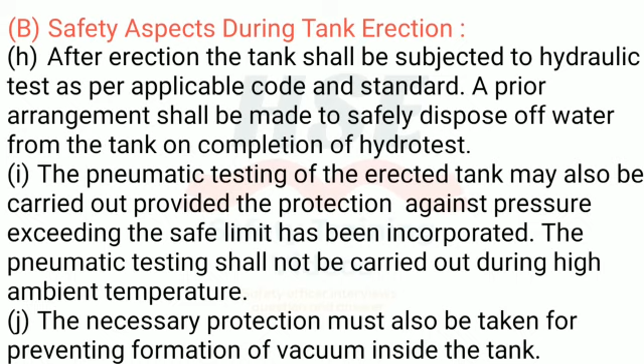I. The pneumatic testing of the erected tank may also be carried out provided the protection against pressure exceeding the safe limit has been incorporated. The pneumatic testing shall not be carried out during high ambient temperature. J. The necessary protection must also be taken for preventing formation of vacuum inside the tank.

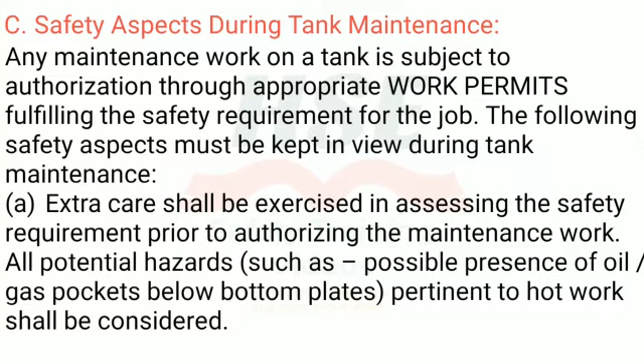A. Extra care shall be exercised in assessing the safety requirement prior to authorizing the maintenance work. All potential hazards, such as possible presence of oil, gas pockets below bottom plates, pertinent to hot work shall be considered. B. The stability of tank roof structure must be ascertained before attempting to land on it.

If required, firmly supported scaffolding may be erected prior to accessing the location. C. Plates are not to be thrown from the top of tanks but lowered to the ground by ropes or lifting tackle. Steps must be taken to ensure that materials and tools do not fall to the bottom of the tanks. D. Handrails around tank tops must not be used to support any form of scaffolding or in raising or lowering of roof plates.

11.14 Pipeline safety. A. Safety aspects during pipeline installation. The following safety aspects must be kept in view during pipeline installation. A. The workers deployed for installation or dismantling stacks of pipe must protect themselves from hazard and danger associated with the work. B. The pipe spool shall be guided into position using tag lines attached to it.

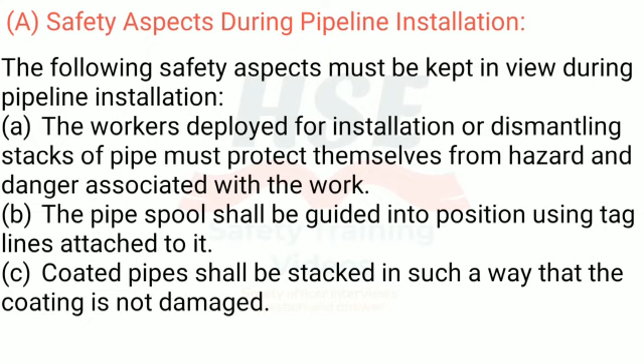C. Coated pipes shall be stacked in such a way that the coating is not damaged. D. The pipes being transported through trailers or sea-bound vessel shall be secured along with side restraints to prevent any accidental fall. The pipe shall be lifted safely with suitable lifting gear and tackles and must not be dragged at site.

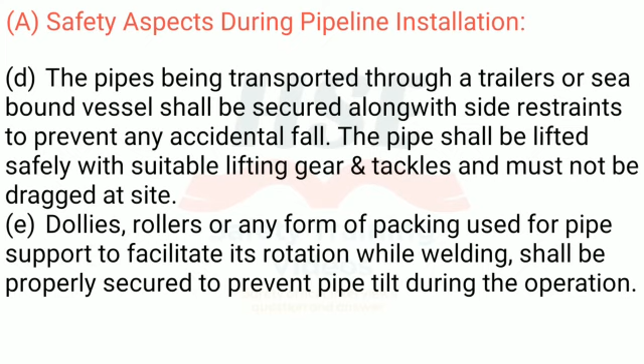E. Dollies, rollers or any form of packing used for pipe support to facilitate its rotation while welding, shall be properly secured to prevent pipe tilt during the operation. F. The submarine pipelines shall be suitably buried under the seabed and protected from accidental damage as per international standard and recommended practice in this regard.

G. The most suitable measures, such as pipe sleeve, thickness compensation, covering with concrete slabs or culvert, shall be used to protect the pipeline crossing near the road. H. The exposed portions of pipelines shall be identified as per color coding stipulated under company standard. I. The valve pits and sump shall be kept free from water or hydrocarbon accumulation.

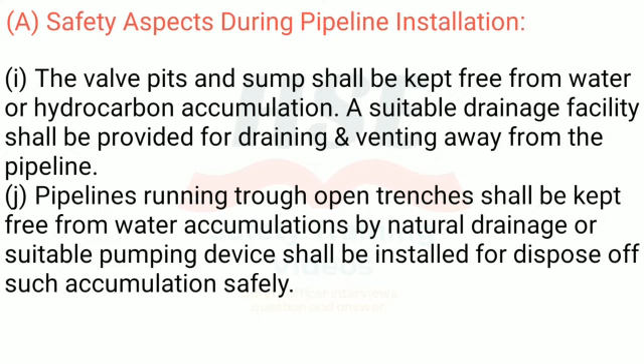A suitable drainage facility shall be provided for draining and venting away from the pipeline. J. Pipelines running through open trenches shall be kept free from water accumulations by natural drainage or suitable pumping device shall be installed for disposal of such accumulation safely. K. The hot surface pipelines shall have proper insulation preventing injury due to accidental contact. L. The pipeline supports must be properly designed and installed avoiding undesirable stress in the system.

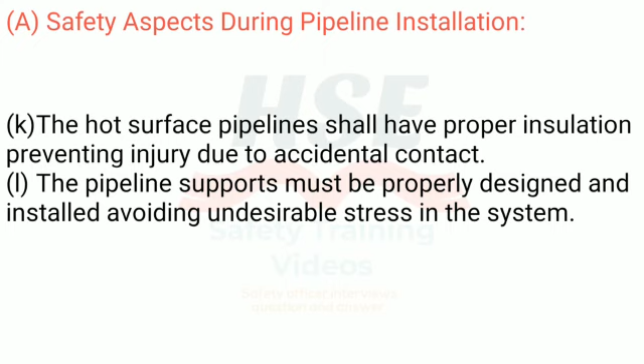B. Safety aspects during pipeline operation. The following safety aspects must be kept in view during pipeline operations. A. The valves and fittings on the pipeline shall be operated by authorized personnel only. B. The necessary care shall be exercised to prevent excessive pressure buildup due to ambient temperature rise in closed sections of the pipeline.

C. A close monitoring shall be kept and pipeline shall be regularly inspected to assess its health and integrity. D. In case a pipeline carrying hydrocarbon, chemical or other harmful material leaks, then the surrounding area shall be considered as hazardous area and accordingly precautions complying with fire and safety regulations shall be strictly implemented. E. The required warning notices shall be posted at appropriate location depending upon nature and extent of leakage.

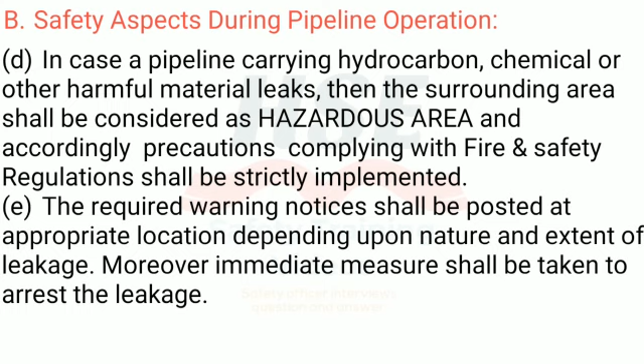Moreover, immediate measures shall be taken to arrest the leakage. F. The area shall be cordoned off and corrective action mobilized with all safety considerations in hand. G. The leakage site shall not be left unattended until necessary repairs have been made, leak arrested and the area is declared safe after thorough inspection.

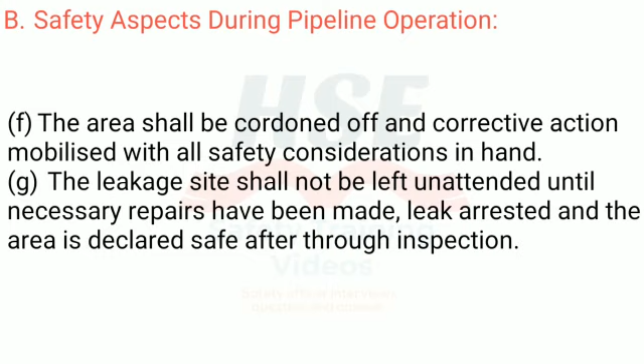C. Safety aspects during decontamination of pipeline. The following safety aspects must be kept in view during decontamination of pipeline. A. All decontamination works, such as depressurizing, venting, draining, flushing and purging, shall be carried out in compliance to work permit system in this regard. B. Prior to draining the pipeline content, the arrangement must be made to dispose it off safely and in an environmental-friendly manner. C. The workers deployed for dismantling of pipelines must take necessary care against possible exposure to line residues.

D. It is prohibited to use compressed air for purging an oil pipeline, where subsequent welding is to take place. Air must never be used under any circumstance.